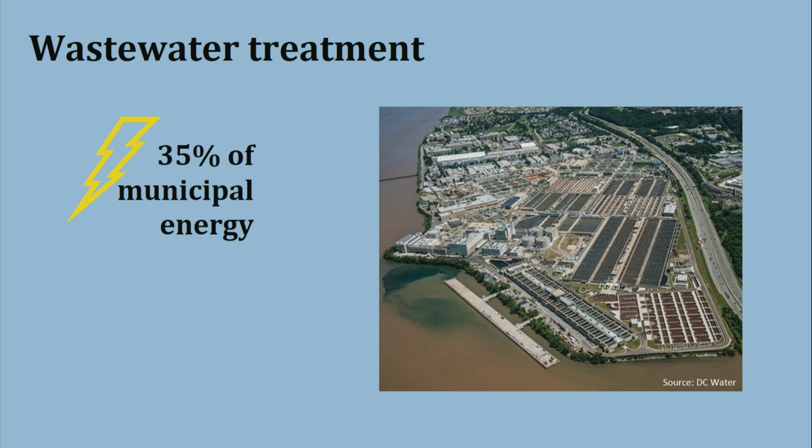When we start to think about why it's important to responsibly develop these wastewater treatment plants in China, there's two things I want to have in the back of our minds. The first is that wastewater treatment takes about a third of a city's municipal energy demand. So if there's a way that we can take the energy that could be created in the wastewater treatment process and turn it back into the treatment center, then we can reduce that energy demand on Chinese cities, or any city, and really change the paradigm of cities' sustainable wastewater treatment.

Secondly, landfilling sludge is really expensive. A medium to large city spends about $100,000 per day landfilling sludge. So if we can keep that sludge out of landfills, we can save money, we can save energy.

So to make sure we're all on the same page, let's talk about how standard wastewater treatment works. First, the customer makes wastewater. It goes to the wastewater treatment plant where it goes through a process called clarification, meaning we're settling out the big stuff—solids, sand, and grit. That goes to the standard wastewater treatment plant.

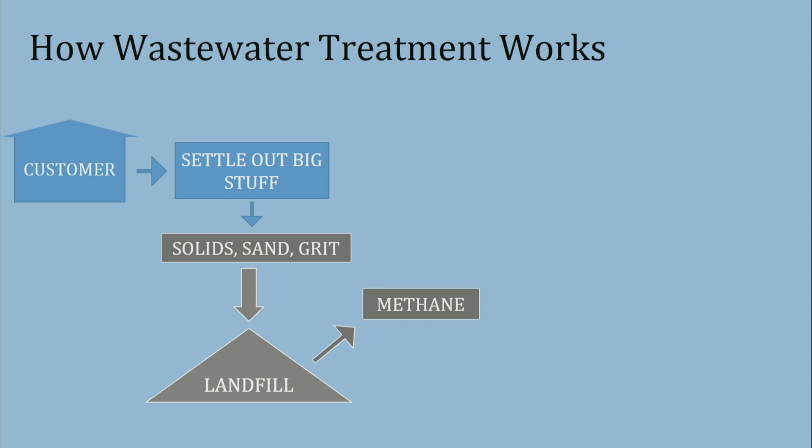That means it goes to a landfill, if we're lucky, and not into a waterway in China, or dumped in a farmer's field. And then while that sludge is in a landfill, it's creating methane, which is a greenhouse gas—I'll let Patrick touch more on this. But essentially, during that process of landfilling, bacteria is eating away that sludge, creating methane, and the methane is going into the atmosphere.

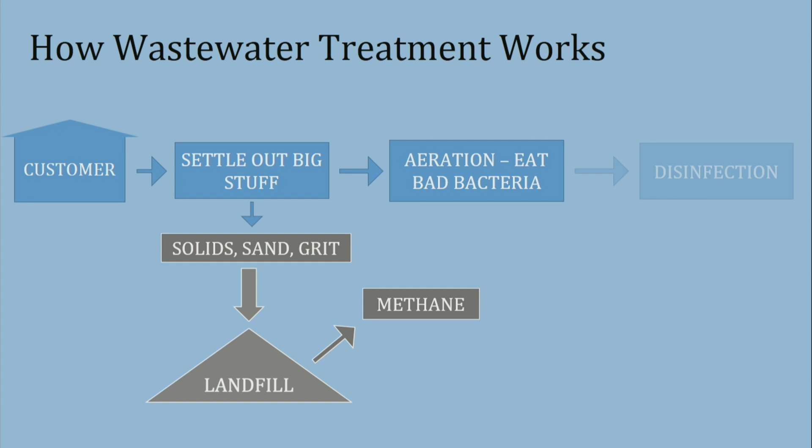Back to the wastewater treatment plant: the water that's left after the big stuff is settled out goes through a process called aeration, where bad bacteria is eaten out, much like Pac-Man. And then it's disinfected and goes into some sort of surface water body.

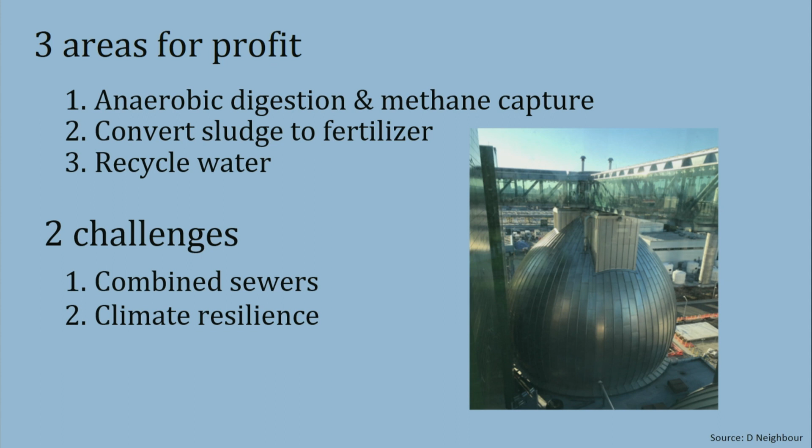Once the methane is captured, we can actually use that for power. We can power the wastewater treatment plant, which is great because we know they require a lot of energy. We can use it for vehicle fuel, or we can sell it to a power distributor.

Then we can take the sludge that's left in that anaerobic digester and turn it into fertilizer. Finally, instead of putting that water into a surface water body, we can actually recycle it back to the customer. We can do that through indirect or direct potable reuse.

As we're thinking about this, there are two main challenges that wastewater treatment plants face on a municipal level that I'll touch on. The first is combined sewers. A combined sewer actually transports both stormwater and wastewater together.

And these are an especially significant issue when we think about anaerobic digestion, because what you're getting when you're doing anaerobic digestion is you want to create a lot of methane, because if we're going to use that methane productively, we need to be able to have more of it. So when we're digesting that, we want essentially to give those germs, those microbes, a lot of fuel. So we don't want watered down wastewater. We don't want wastewater that's been transported with stormwater, because that will make anaerobic digestion more difficult.

Finally, we want to think about climate resilience. How do we keep wastewater treatment plants functional in the face of a changing climate? So what will this look like going back to that initial wastewater treatment process? How can we improve it?

First, we're still going to go through the clarification process, but instead of putting those solids in a landfill, we'll put them in an anaerobic digester. We'll capture that methane and use it productively, and then we'll treat that sludge and use it productively as well. And make money.

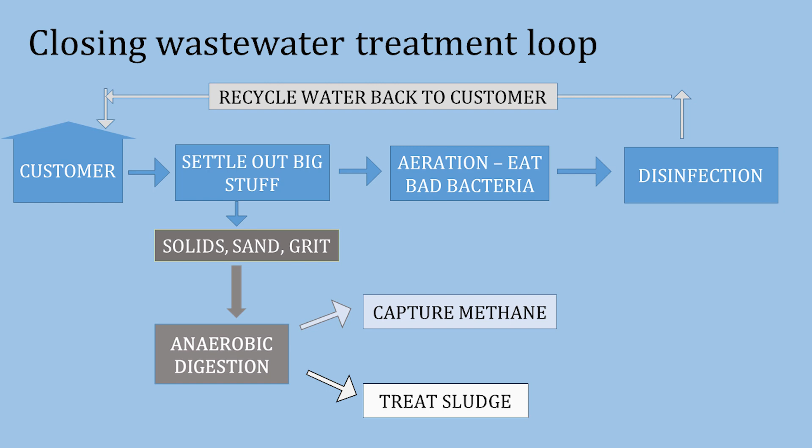So how does this look in China? While I was at Tsinghua, I specifically looked at Beijing's water recycling. Beijing is very interesting because it actually has a lot of water recycling. Unfortunately, the water recycling that's going on in Beijing is highly decentralized. So we've got an extremely populous city, but we have heavily decentralized water recycling.

Any building that is 30,000 square meters or larger is required to have a water reuse center inside of the building. Unfortunately, that means that people like landlords are responsible for operating a water recycling plant, and that leads those plants to being not used. Only about 50% of them are even online, not trusted by the customer, and they're not monitored at all. There's no legal requirement to have those systems be monitored.

And so that leads to municipal wastewater treatment plants falling behind, with very rare anaerobic digestion. There's some good news: some cities like Beijing do have one great anaerobic digester, as does Shenzhen, but overall municipal anaerobic digestion has a lot of room to grow in a country with heavy urban centers that present great opportunities for anaerobic digestion.

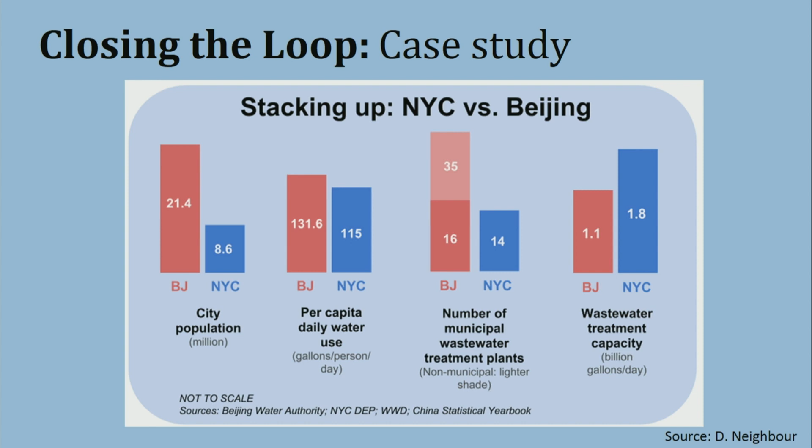So looking at ways that we can improve China's wastewater treatment plants, I wanted to look at one city in particular so we have something to start with. New York City is a good case study to use, because while it has about a third of the population of Beijing, it actually has more wastewater treatment capacity than Beijing. And the per capita daily water use is about the same, as is the number of municipal wastewater treatment plants.

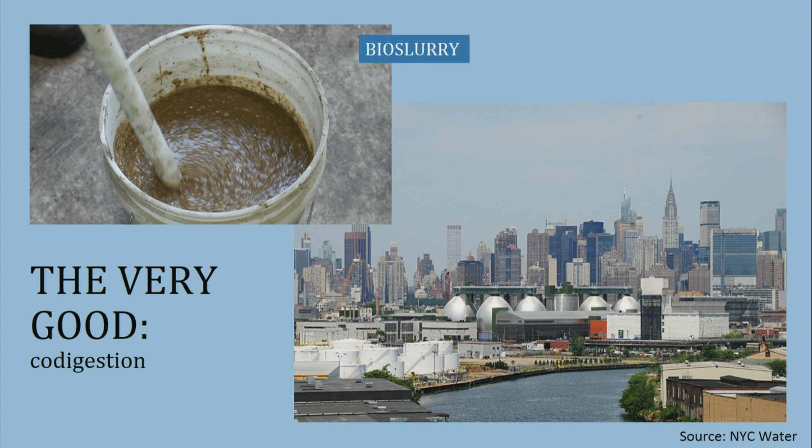To start with something great that New York City does: they use a process called co-digestion. As I mentioned before, we want heavily organic waste going into these anaerobic digesters so that we can create more methane. The way that New York makes that waste more organic is they collect food waste from different areas of the city and put it into anaerobic digesters. Here's pictured Newtown Creek, which has 8 anaerobic digesters, 4 of which are using co-digestion. That keeps both food waste and municipal solid waste out of landfills and creates more methane.

Then New York is able to use that methane productively. They convert it to energy through fuel cells and generators, and then they're in the process of selling it to National Grid, which is New York's power distributor.

Unfortunately, New York has some room to grow with its sludge management. It often ships sludge out to the rural South and the Midwest, and as a Kansan, I especially don't like this.

So it definitely has some room to grow with its sludge management and being able to use that sludge productively. To think about how this would apply to China, again, 80% of sludge in China has been illegally dumped. Because of some great laws, including the Water 10 plan in China, this may have reduced slightly, but we're still at 75%.

China has had success on wastewater treatment plants, particularly after they were announced as getting the Olympics for 2008. But they only have about 70 anaerobic digesters in China, with only 5 to 10 functioning well. Lots of room to grow.

Is that just wastewater or overall? For wastewater treatment plants specifically. It could be really good to do this also for piggeries and food production, but that's not happening quite yet.

Thanks, Jennifer. Thinking about ways we can make these systems more resilient: during Hurricane Sandy, 8 out of New York City's 14 wastewater treatment plants came offline. That led to massive sludge dumping in waterways and on streets. In response, New York created a wastewater resiliency plan and is one of the first cities to have done so.

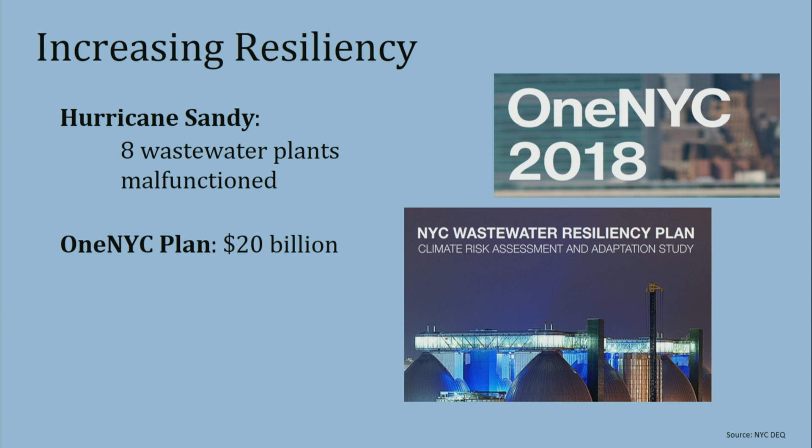That is a $20 billion effort, and I can get into more specifics if anyone's interested. But the thing to think about for China is that many of its large cities are on the coast, and 12% of China's population lives in low elevation coastal zones. When we think about treatment plants at risk, a significant amount of China's population is fed by municipal wastewater treatment plants that are at risk of flooding.

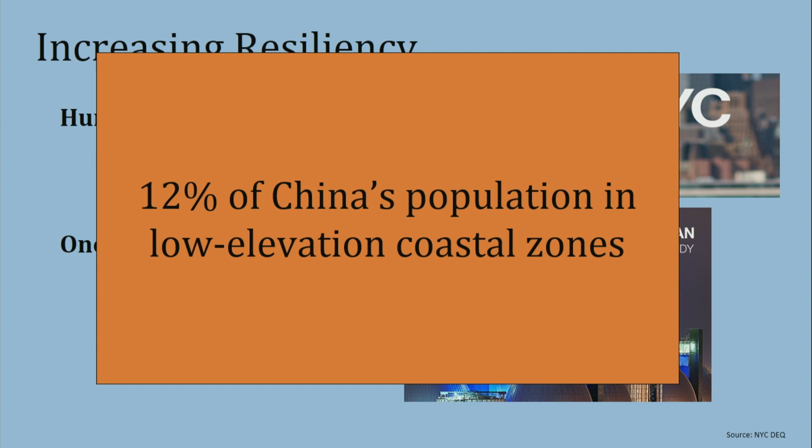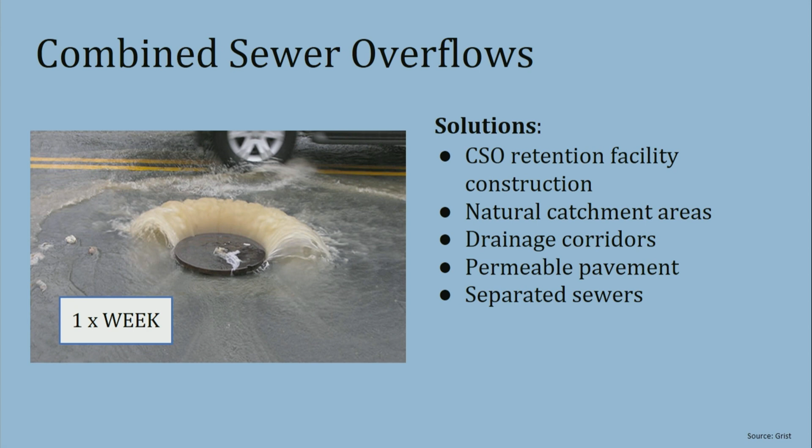There are some options New York has started to implement to prevent these, including permeable pavements, drainage corridors, and natural catchment areas. Thinking about how this applies to China, we know that Shanghai, Guangzhou, and a lot of other cities have significant combined sewer overflows.

Numbers are hard to find because they're not monitored well, but we know that almost 500,000 tons per day flow into the Liuxi River. So to wrap this up and think about how we can apply it to China, China really has an opportunity to turn waste into profit here.

First, by centralizing wastewater treatment and water recycling, and then using anaerobic digestion and food waste co-digestion, we can really allow that waste to be turned into profit. As China begins to think about COP and NDCs, nationally determined contributions, it can really help meet its Paris Agreement requirements by using these processes.

It can also treat and use biosolids as fertilizer. Finally, recycling water can really help lower the burden on China's water crisis. We know China has severe water challenges, especially in cities like Beijing, which are situated in the desert, so recycling water can really reduce that.

We can also address combined sewers and make those plants resilient to shock, so that once we've created these resource recovery facilities, we know they're able to continue operating in perpetuity. To finally address water recycling, those challenges I mentioned in Beijing, the ways we can address those issues are, first, enforcement and monitoring.

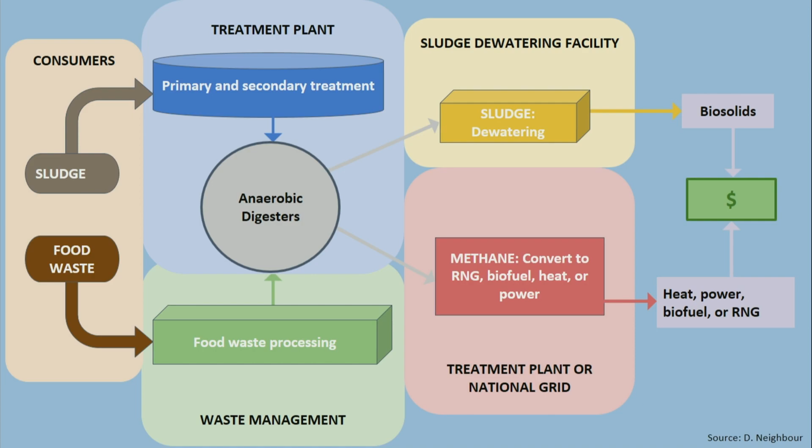Before you go off that slide, can I interject because of the work I've been doing with the EPA? If you look at it, think of the sludge as the wastewater bureaucrats, and food waste as the solid waste bureaucrats. In China, the Ministry of Housing and Urban and Rural Development houses both those functions for cities, but it's taken some time, and they're still in different offices within that same ministry. So the stovepiping can be a real hindrance to getting these two sides to even talk to each other, but it's getting better.

I think in California, you guys have done it, and so we want to hear how you did it.

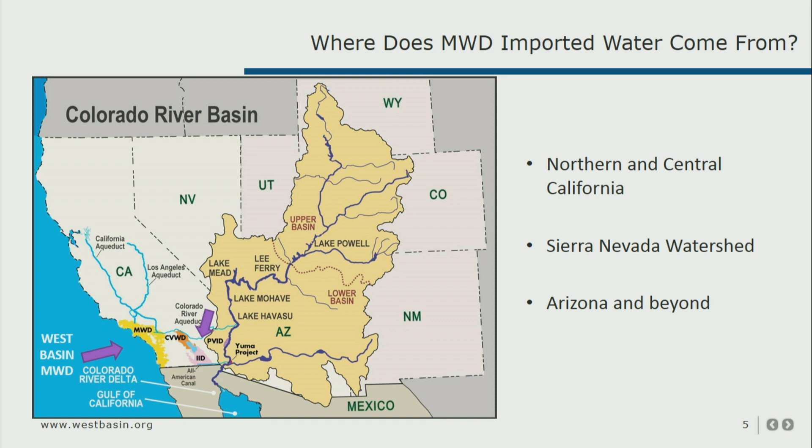We also have our Northern California supply source, which I'll go into on the next slide. It just shows you—which is what China is doing as well—that there are areas where you have water and areas where you don't, and you have to move it around.

I really love this slide because I think it puts everything into perspective for California. In the southern part of the state, we have 3 water sources that serve us. The yellow aqueduct there, a 233-mile aqueduct, is the LA aqueduct, built by Mulholland back in the 1911 to 1913 period to serve the city of Los Angeles.

LA still owns and operates that aqueduct. It used to supply a significant amount of the water to the city, but over time it's been reduced, particularly because they were overtaking too much water from the Owens Valley. At this time, it runs usually about 20% of LA's water supply through that aqueduct.

The other 2 sources you see there—the blue one is the Colorado River Aqueduct, built in the 1920s going into the 30s, really. It was authorized in '27, but it was over the Depression when they actually built it.

And I believe it started production in 1945. But that was a huge source of water supply for Southern California.

And then later, the third aqueduct, which is in red, that's our State Water Project. So that's the water bringing, or the aqueduct bringing water from Northern California, from the Sierras. It flows through near Sacramento, through Oroville, where we had the dam that nearly failed a couple of years ago. You probably all heard about that in the news.

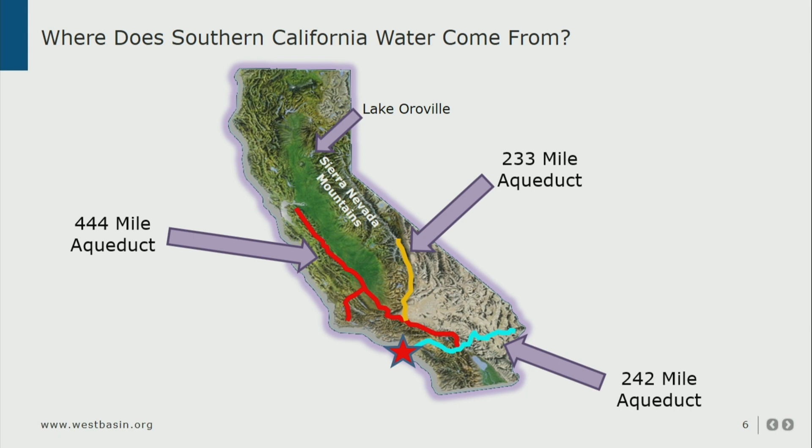But again, you look at this, it's about 2/3 of our water supply coming into the region. As a matter of fact, almost 60% of our water supply for almost 20 million people. And 2/3 of our precipitation is falling in the northern parts of our state, while about 2/3 of our populace live in the south. So we're very dependent on imported water, as well as what groundwater we do have, and then what I'll be talking about, which is recycled water and other water sources.

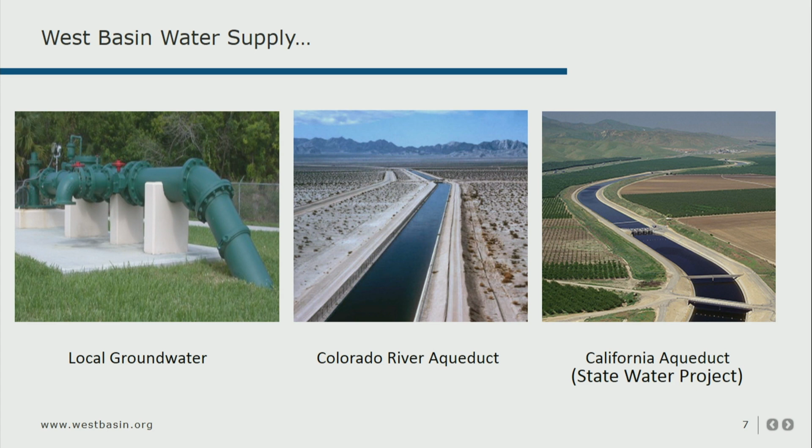But in our local area, we are dependent on groundwater. We do have some groundwater in our area, and in other parts of our service area, they don't have any groundwater. So it's in pockets, even near the beach, near the ocean. And then, of course, we get our water from the Colorado River and from the State Water Project, which is the Delta.

Just to give you some perspective, back in 1947, when our district was formed, all we had was groundwater. And the reason they formed the water district where I live is because they were overdrafting the groundwater, and they were getting saltwater intrusion. They had to find an alternative water source as the population was growing.

So you can see this is right after World War II. There's a lot of growth in Southern California. They formed the West Basin Water District really to buy water from Metropolitan, from the Colorado River Aqueduct, and get additional supplemental water coming into our residents.

And so you fast forward all the way up until about 1990, and you can see by then we were very dependent on imported water. The two aqueducts that we have access to, because we do not get any of the water from the Los Angeles Aqueduct. That's just for the city of LA.

So all of us independent cities, we have the other two aqueducts that provide for us. And by the way, LA is a member of Met, so they actually buy that water too. So they're getting water from three different sources. Ultimately, we're all competing for this water that's coming into our service area.

But fast forward to today, and we've really diversified our portfolio. Our water district is much more forward-thinking and ahead of the game than a lot of them were. Back in the late 80s, early 90s, there was a major drought, which is where the leadership at the time embarked on recycled water. And so you can see right now we've lowered our threshold of dependence on imported water to about 55%. We do a lot of conservation work, that's the green arrow, shaded area. And we do about 9 to 10% recycled water to serve our constituents.

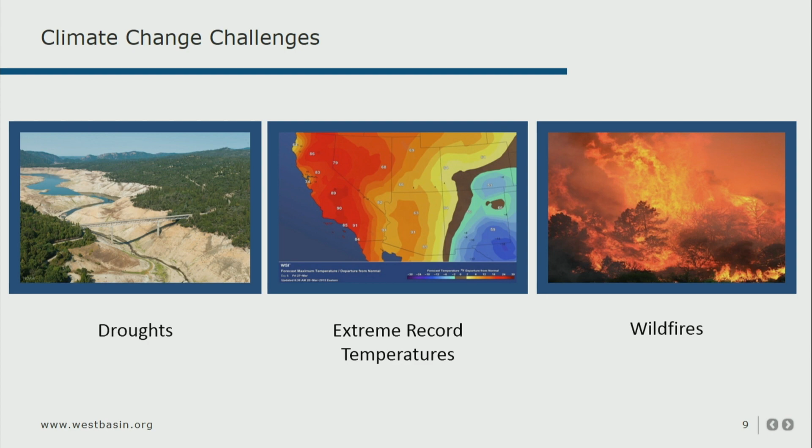Obviously, climate change and all the challenges that we face, certainly not unique to the West, but for us, of course, lots of ups and downs with drought. Some are very short, some are very long. We have extreme record temperatures, as you know. We have wildfires. It just seems like our wildfire season doesn't end anymore at this time in California.

And then we have competing demands. So the environment really, at this day and age, we look at the environment as a customer of water, especially in the areas where you could potentially take water. So if that's where those aqueducts begin, up in the Sierras or over in the Owens Valley, there's been a lot of litigation, and we can't pull the same amount of water that we used to. So that's one of the customers, if you think about it, before it even gets into an aqueduct to serve us. And we have agricultural interests, we have urban interests.

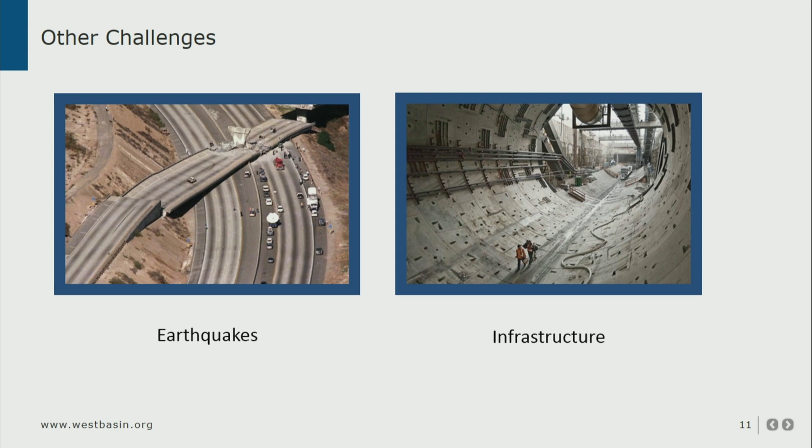And obviously, it's earthquake country. So all the aqueducts I've mentioned, they're crisscrossing faults multiple times, and then infrastructure in general. Most of this is older infrastructure. There's constant maintenance and making sure it's going to supply the folks as we need it to.

So basically, looking at West Basin and who we are and our role as a water district in Southern California, we're really focused on what we call water for tomorrow. We want to have a secure water supply, locally controlled, which is why water reuse or recycled water is a big thing.

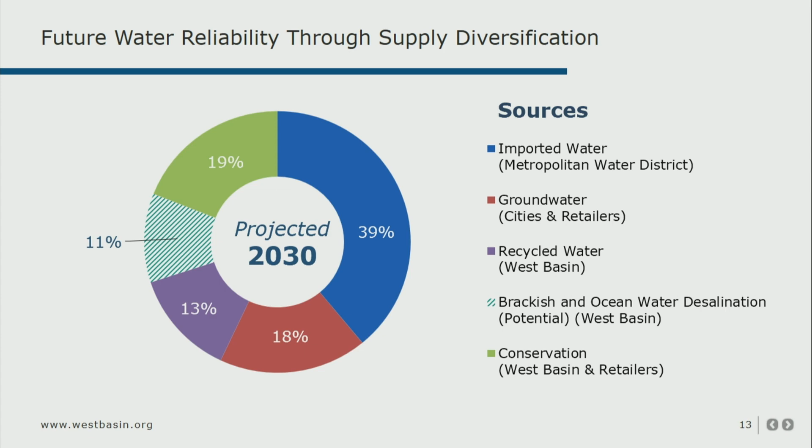This is a projection for the future in 2030. We still want to continue lowering our dependence on imported water. We want to push conservation heavier, and we are building out our recycled water program so it incrementally gets larger. We are also looking at ocean water desalination as a potential option.

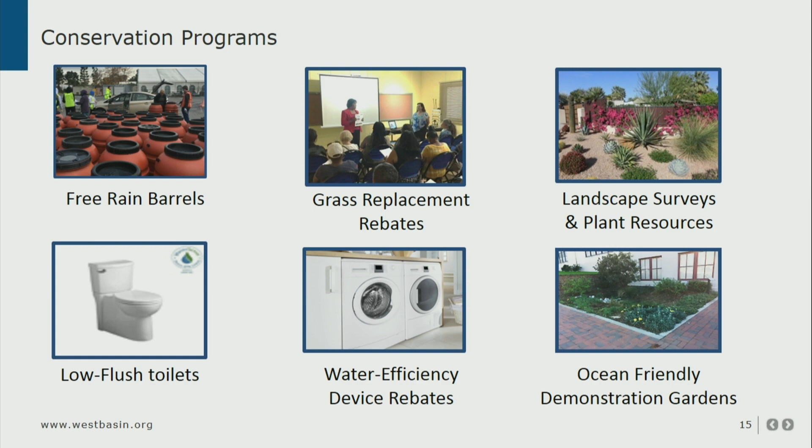It was mentioned earlier, conservation is a very big deal. You can never take your foot off the gas on conservation. We have a lot of programs for our residents, whether it's free rain barrels, taking out your turf, or rebates for water efficient appliances. One of the biggest things we're pushing right now, all of us in Southern California, is take out your grass.

We are incentivizing that. Metropolitan will give you up to $2 a square foot, and West Basin will throw in an extra $1. So we've got a pretty robust program right now to push residents to change out the grass and put in drought-tolerant landscapes and plants.

Real fast here on our recycled water, because I want to get into the nitty-gritty of the system. Back in the late 80s, early 90s, there was a major drought, and West Basin was very beholden to imported water or what limited groundwater we had. So our agency looked at a local drought-proof supply source. We have a unique situation because we don't own a treatment plant, we don't own a wastewater treatment plant, so we actually partnered with the City of Los Angeles to buy their treated effluent.

Otherwise, a portion of that would have gone out to the ocean, lost into the Pacific. So we worked with them to purchase that water. We built a facility in the early 90s that is world-renowned, and we have not only our plant, but a series of satellite facilities. I'm going to show you some pictures in a moment.

Partnerships are very important, and that's what's really interesting when you talk about how we're all trying to make everything work together. At West Basin, obviously we have our partnership with the City of Los Angeles. We had to secure the real estate for the infrastructure, different public-private partnerships for operations and customer engagement, and public outreach was huge.

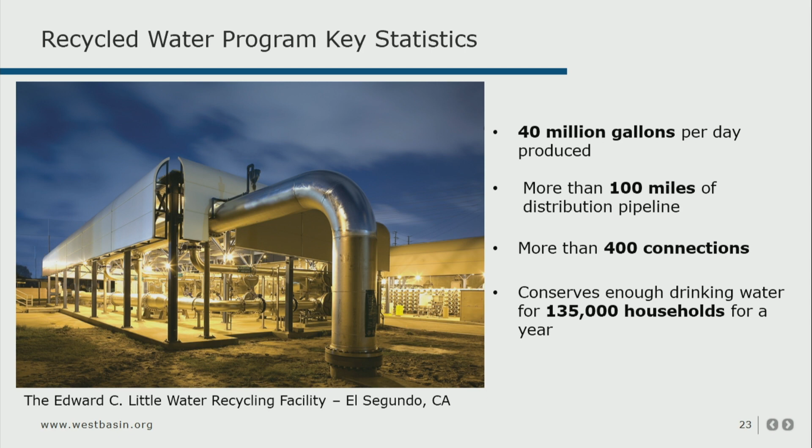But the recycled water key program statistics at West Basin: we produce 40 million gallons a day of recycled water at our plant, just south of LAX. We have over 100 miles of purple pipe distribution system across our region, more than 400 connections. And basically it conserves enough drinking water for 135,000 households a year.

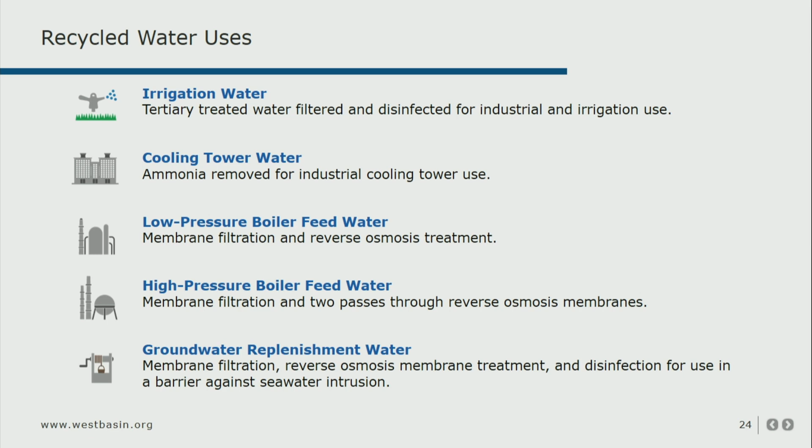You can come visit the facility and actually drink the water, but we have to inject that into the ground, into the aquifer beneath our coastal communities to continue keeping out saltwater intrusion. So all these years later, that's still a piece of what we do that started this agency.

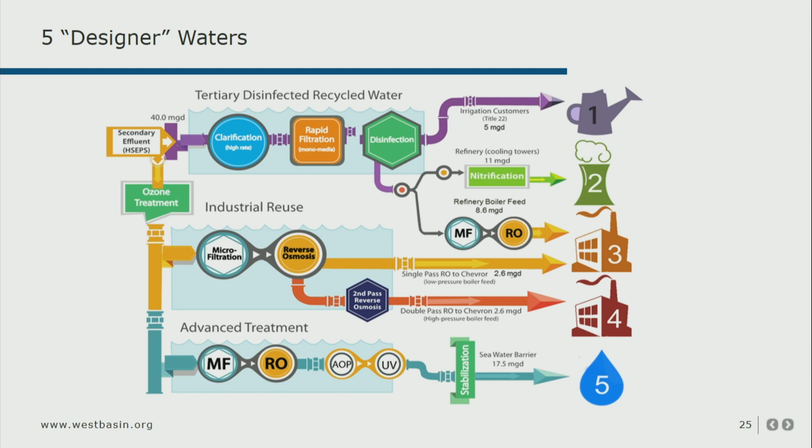This is just a schematic of the 5 different waters and the different treatment processes involved. Kind of like a boutique water shop. We really are, yeah, we call them fit for purpose, or designer water. Yes, because these were specifically designed with those customers in mind. So if you're working with one of the refineries and they need a certain quality of water, it was designed to suit that need, or working with the groundwater treatment regulators to do that.

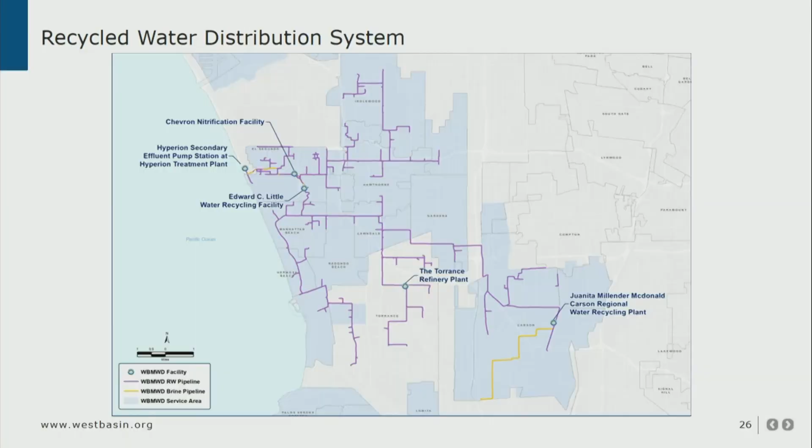Our recycled water system, as I said, has over 100 miles of purple pipe throughout our region. These are a lot of our different partners, whether they're local city governments, private water company retailers in the area, or a lot of corporate partners, whether it's an industrial campus or a college campus, or let's say Honda. Honda has a very big campus in Torrance that we serve their outdoor irrigation.

Real quick here, partnerships again. When it comes to the potable quality water that we produce, it is a very unique and complicated partnership because there's multiple entities involved. So we're buying this pre-treated sewage water from Los Angeles, from DWP and Sanitation District. Then we are recycling that water.

We're working with our contract operator. We own the plant, but our contract operator is Suez. They actually run the operation, if you will. We work with the LA County Department of Public Works, who has the groundwater wells that we inject through. Cal Water Service, they're the ones that actually maintain our lines, that's a contract. And then our retail customer that we actually sell to is called Water Replenishment District.

So to be honest with you, it's a really complicated partnership, but it's over 20 years in existence, and it's tremendous. Mayor Garcetti, in the city of Los Angeles, is talking about continuing to recycle more water. We want to lower the discharge that goes out into the ocean, and this is where California is heading. The mayor in our neighboring city of LA has really picked up that mantra and is pushing us all hard to do that. West Basin has a big partnership with Los Angeles to make that happen.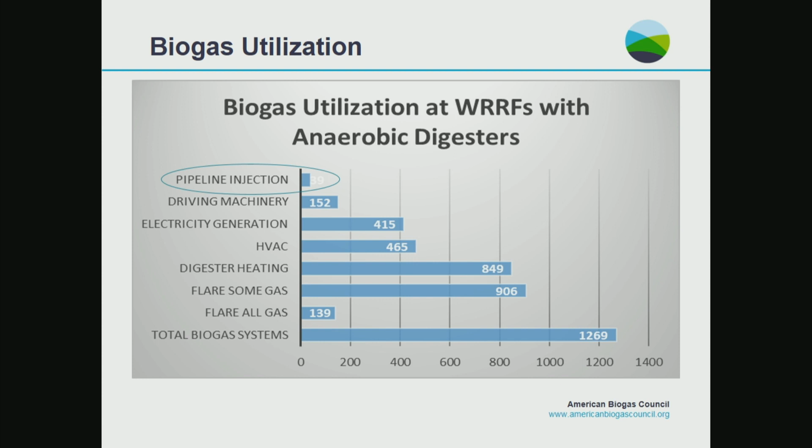We actually had 2 wastewater facilities join just this week. Sioux City, Iowa was the one that joined last night because they are doing just that. And are they piping a lot of it, dare I say, to California?

Everyone's trying to. Because there's a federal policy, a federal program, the Renewable Fuel Standard, and there's a low carbon fuel standard, which is mostly a California program, and you can stack the two together. They're both vehicle related, so if you can sell to California, you get to take advantage of both programs, and that's where you make the big bucks. I learned something.

This is the percentage of the operating wastewater facilities that have a biogas system, whether they're adding food waste or additional organics of some kind. You can see there's a very minority of those facilities adding in additional organics. The main reason for that is it's just a little bit more complicated, you need a little bit more equipment. It's not that hard, but you can't just take an existing wastewater facility that's used to producing a very homogeneous sludge coming out of sewage and add things like food waste, which is a lot more variable and can have the risk for contamination.

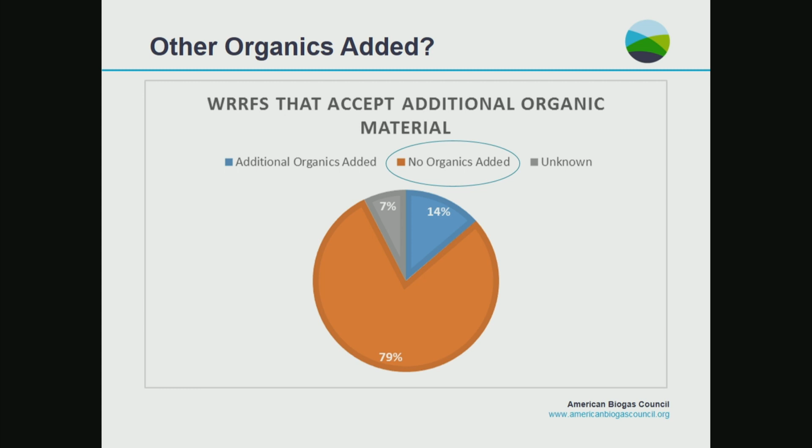You generally don't have that many forks that you're screening out of our wastewater, although there's all kinds of interesting things that come through there. But you're going to have a much higher proportion of those kinds of things once you start dealing with food waste.

All right, so now we get into the projects. A couple of projects here to show you. This is Forest County Potawatomi, an American Indian nation in Wisconsin, and they have a casino. They've put a digester system in the back of their parking lot, as you can see at the bottom. We love that because they are taking the wastewater and the food waste from the casino, which there's plenty of, but they're processing it all right there on the property.

And this is not a small biogas facility. We've been doing some work with IndyCar this year, and we had three drivers show up to the facility. It's interesting because the things that go into a biogas system can be very gross. You can't have bad smells in the parking lot of the casino or the hotel. It was interesting to see the IndyCar drivers walk through and say, oh yeah, it's just some tanks and some piping. Then they went into the facility where the material was, and it smells very different. It just shows you that with some very simple engineering, you can handle really gross stuff right next to where people are, but you have to do it right.

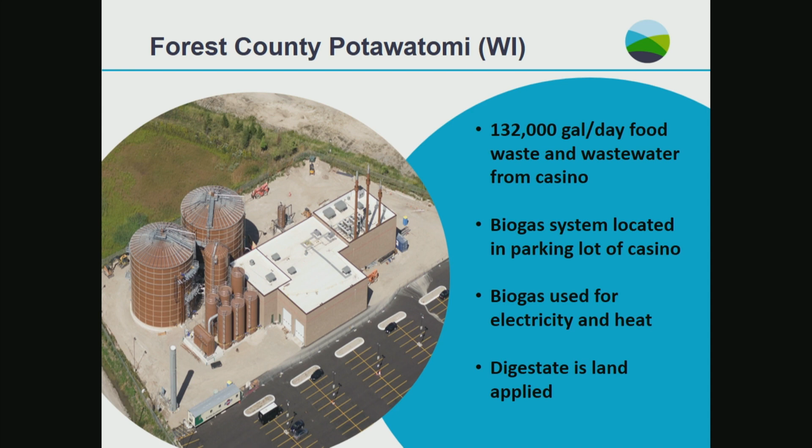Being an American Indian culture, they are extremely proud of the fact that they are handling all of this material on site, and even some imported material from around the area. They are basically treating our earth better than we would be otherwise, and that story is really, really important to them. They're making electricity and heat from their biogas, and they use the digestate, the digested material that goes through the biogas, as a soil conditioner.

All right, so here's another one. Walt Disney World, if you go to those resorts, they produce a lot of wastewater, and they have a couple different wastewater plants down there. One of them was taking their sludge, pulled out of the wastewater, and composting it, and it smelled awful, which was particularly a problem for the neighbors nearby, including some canine training folks and some people growing ornamental flowers. So one of our members went down there and said, hey, why don't we take your composting facility, why don't we buy that land from you, and we'll take all your wastewater sludge and digest it instead in these airtight tanks that you see.

We're also going to take in food waste from basically anyone that'll give it to us, from all of the hotels and resorts around the area, as much as we can get. They built this, they call it the Harvest Energy Garden. They're also making electricity down there, almost 3.2 megawatts, and a bunch of heat that they're producing. They have a really cool product made from their digestate: they dry it and process it so it's really phosphorus rich, and then sell it to the people growing the ornamental flowers down there for the resorts.

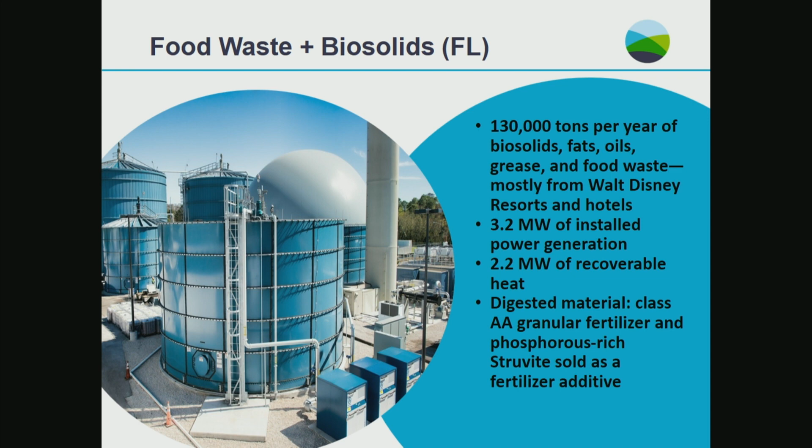All right, this is one of my favorites just because it's in our backyard. I'm from DC, so we love this project. It was built in 2015. For those of you who don't know, DC Water, right across the river, also known as Blue Plains, is the largest advanced wastewater treatment facility in the world. And by advanced, remember Danielle's charts where she was saying there's some screening that happens with wastewater, and then you basically let the solids settle out, and those go to the digester.

She also talked about aeration happening. Aeration is another way to get other solids out of the wastewater, and then those solids go to the digester too. Well, DC Water has a third step: tertiary treatment, which basically means the water coming out of their plant is super, super clean. It's really cool — if you want to go on Google Earth and look at Blue Plains, look at the water in the Potomac River right next to the plant, and it's a beautiful blue next to the brown that surrounds everything out there. If you go there, you'll often see fishermen, because the fish love to congregate there just because of the water quality.

So this plant's obviously been around forever. Before they put in this digester in place, they were taking 60 truck trips a day of solids out of the facility. 60 trucks every single day of our sewage, the solids that are coming out.

The good news was that they were recycling in some local tree farms, a silviculture facility. But now they are digesting that material. And not only does the biogas system do really good things for taking in that organic material, they're producing a ton of energy from it.

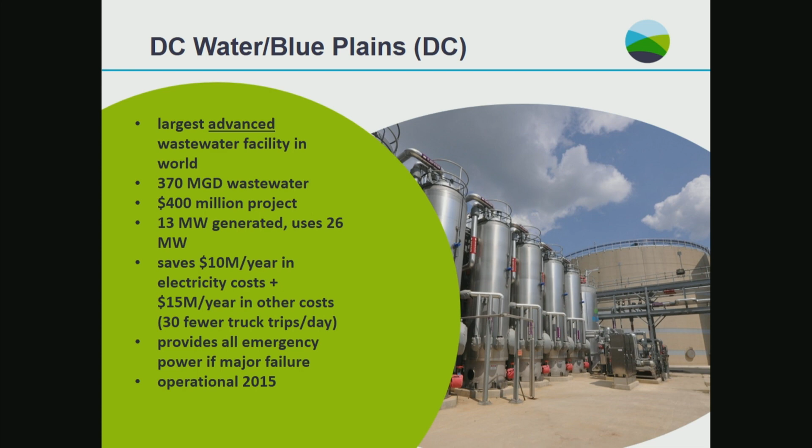All right, good. Just Google fatbergs if you're wondering why. Oh yeah, fatbergs. Ooh, terrible things.

No joke, I took before and after pictures. I should have put them in this slide. Our grass is so green after we just top dressed with this stuff last spring.

So they're branding their product. I'm probably not going to be able to get it for free anymore because they're now selling it in bulk to a distributor that's selling it in Home Depot. So I challenge you to go around your garden center and see if you can find Bloom, which is the way that they're marketing their product.

And it's basically like a mulch / soil conditioner. And the National Park Service is one of the biggest customers, so it's all around the mall as well. Yeah, the big repairs on the mall the past few years - that's so you all contributed to it, right? Yep, exactly. Good recycling right in our backyard.

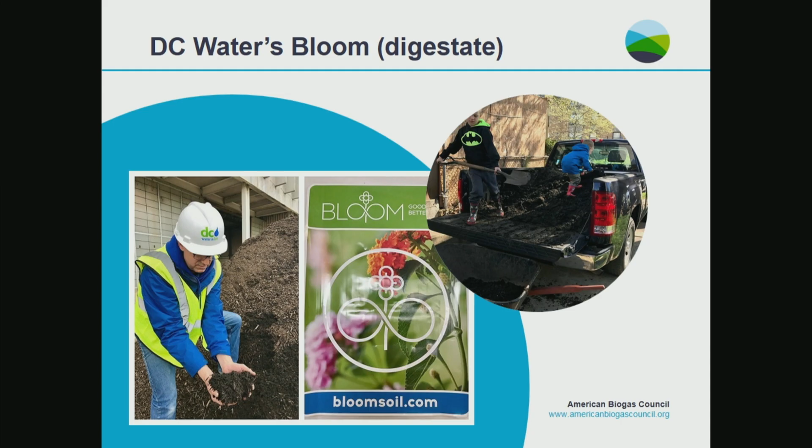And that's it. Thank you.